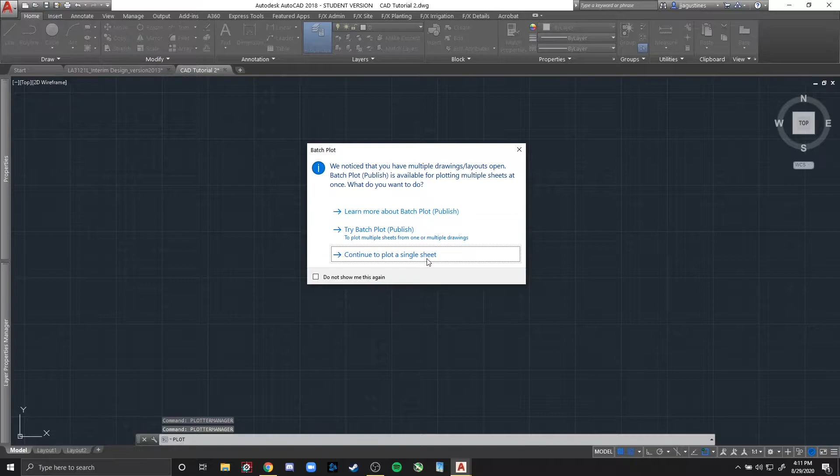And so after you download those styles, once this window is open, all you have to do is take the files you downloaded and drag and drop. And now they are in there, ready for you to use. A CTB, I'll show you right now, so then the next section makes more sense. So a CTB, like I said, attaches certain colors to certain line weights. So for this demonstration, I'll be using LA medium.

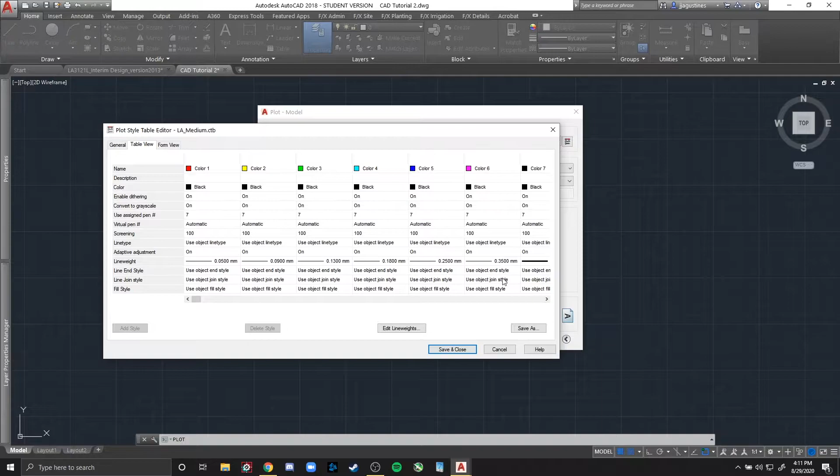And when I click this symbol up here and go to table view, you will see that there are 6 colors, all with their own different line weight. And what you'll notice is these line weights go from thinnest, which is 0.05 millimeters, all the way up to 0.35 millimeters. And that'll be really important for when we go into our layer manager.

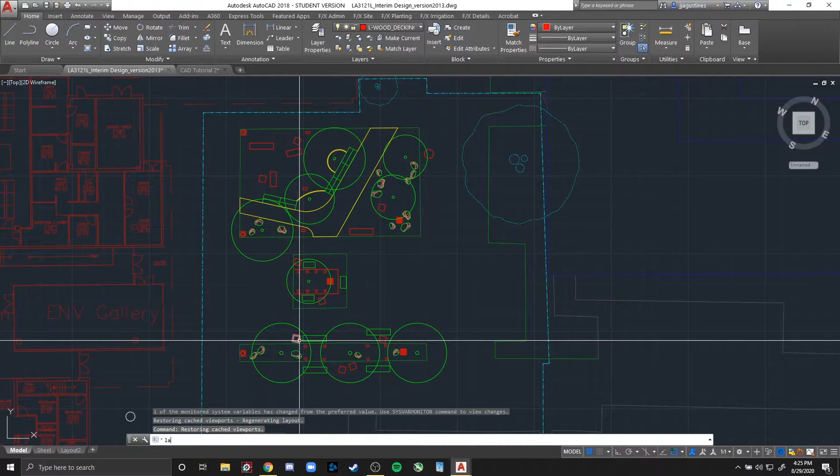So now let's talk about layers. Layers are your best friend. Good layer management is the key to really good drawings. And if you have really good layer management, you will never be lost in any of your drawings. Here's an example of what we did last semester. This is E&D Plaza. And as you can see, there are just a ton of layers. So practice good layer management right now. I'll tell you that much.

So we're going to go here, and this is your layers manager. There are several ways you can get to it. The first one is up here, but my favorite way to access layers is just to type in command, layer, enter, and your entire property manager comes up. There are several buttons you need to know about in the layer manager. The first three are up here. They look like stacks of paper with different symbols next to them.

The one with the orange symbol will create a new layer, or you could do Alt-N. The one with the red X will delete a layer, you could do Alt-D. Or this will set current layer for Alt-C. Some other important things to note in here are the freeze, which is basically your hide and unhide layer, your lock, your color, which we will be using. We will be using these index colors because of the CTB we just uploaded.

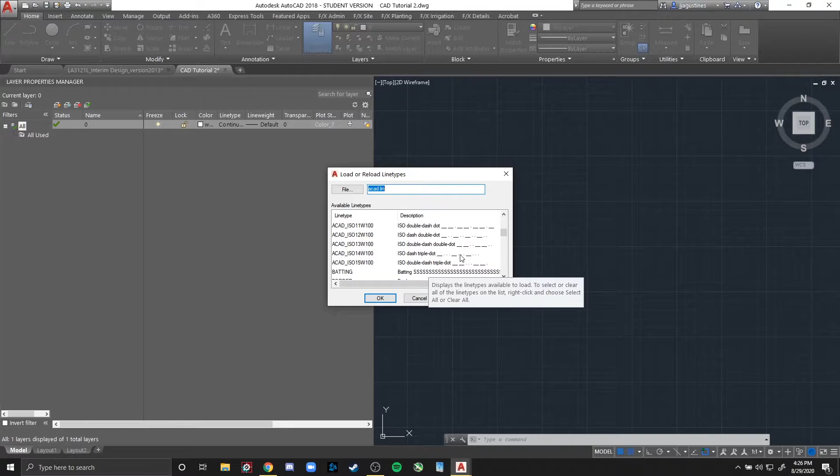Line type, there are different types of line types. There's solid, there is dots, double dash dots, S's, there's a lot of line types. And then we have line weight, which we shouldn't need to touch because of the CTB file, and transparency, plot styles, and stuff you don't really need to know about at the end.

So for this demonstration, I made a little drawing of a park. I have 3 trees, 4 benches, and a plot of land, or well, I guess it's grass. And when we are drawing in plan view, the things closest to the viewer will be thicker. So since my trees are higher up, these will be the thickest, and then the benches will be the second thickest, and then the grass will be the thinnest line.

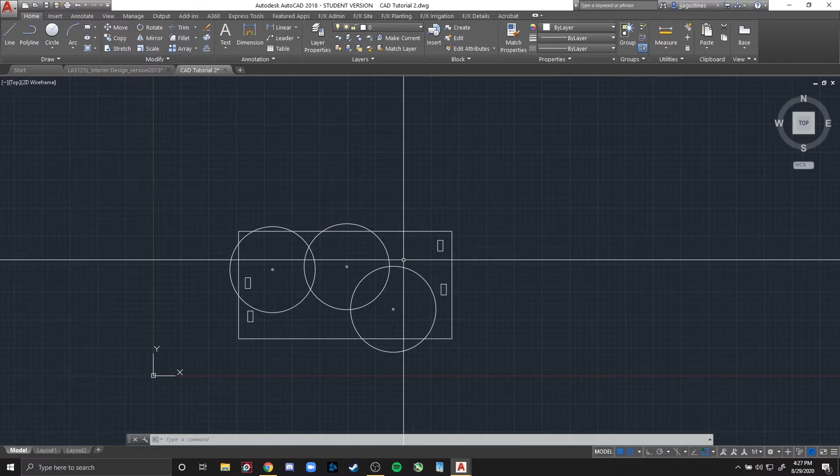So now we're going to go layer, and we're going to add 3 layers to represent each item. And to rename a layer, you could click it once, it will let you rename, or you could press F2 and let you rename, or you could right click and go to rename layer. So now I'm going to name these trees. I'm going to name this one benches, and we're going to name this one grass.

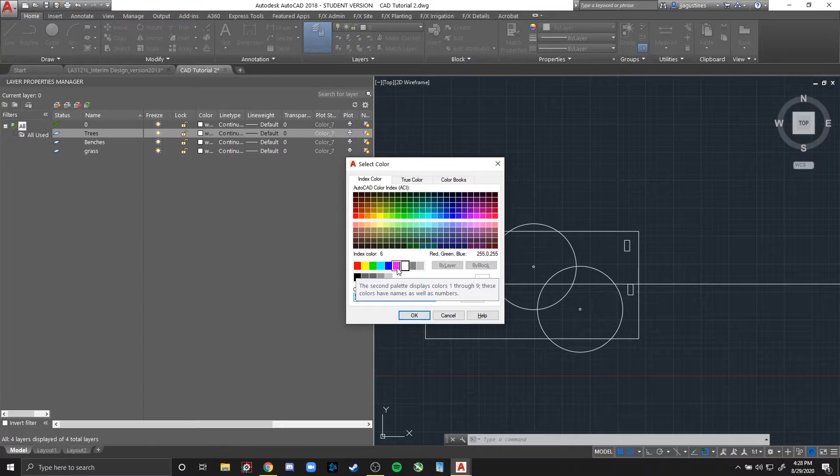And if you remember the CTB file we just uploaded, we know that the index colors from left to right will go from thinnest to thickest. So for right now, since trees are the highest thing in this plan drawing, I'm going to set it to magenta, which should be the thickest line weight. And then from there, I'm going to go down because they should be thinner the closer you get to the ground. But as you can see, my drawing hasn't changed colors.

So what you can do is you could set, let's start with the trees, you could set to the current layer, which is your tree layer, and I want to add this tree to that layer. You could do one of 3 things. The first option is go up here into this layer cell, and you're going to click on the drop down, and then you're going to set it to trees, and it changed colors, which is great. The second option

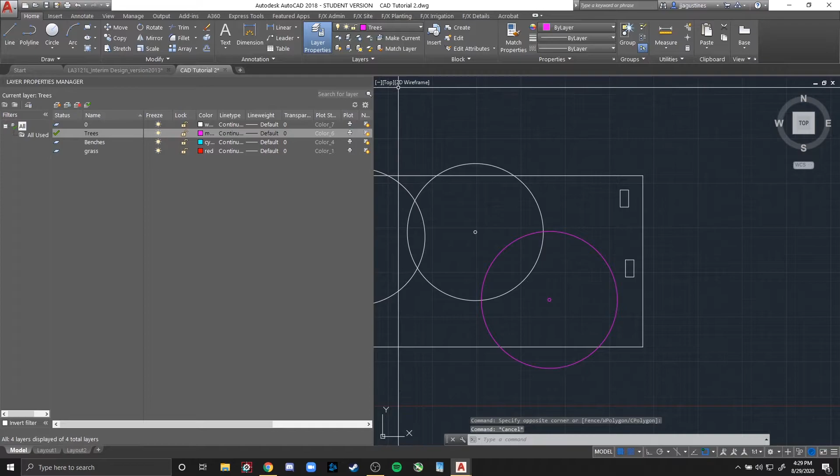is to highlight this tree, and then you're going to type in PR, which is short for properties. And a new menu is going to come up, but all you have to do is look for the layer and change it to trees. And the last way, the shortcut is MA, which is match property. And so we're going to choose a source object, and then now we could change the last tree into the tree layer. And now I'm just going to do the rest of these.

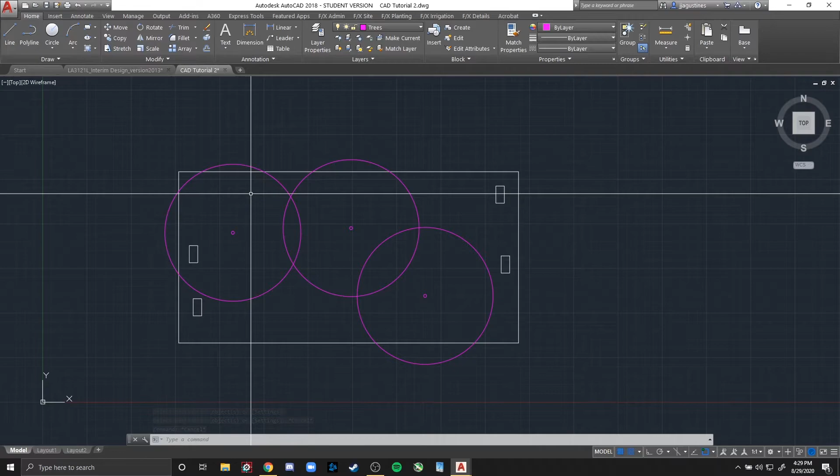Perfect. And now that each of these items are in their respective layer, we could turn them off, we could lock them, can't touch them, and now we are ready to move to our paper space. So at the lower left here, you'll see model and probably 2 layouts. We're going to go to layout 1, and by default,

the paper size is already set to 8.5 by 11, but if you want to, you could type in page setup, and from here you could create your own. So for example purposes, I'll name this one 11 by 17. And now you could change whatever you want, like you could go straight to PDF or OneNote or whatever you want, but just make sure you change your paper size to the correct size.

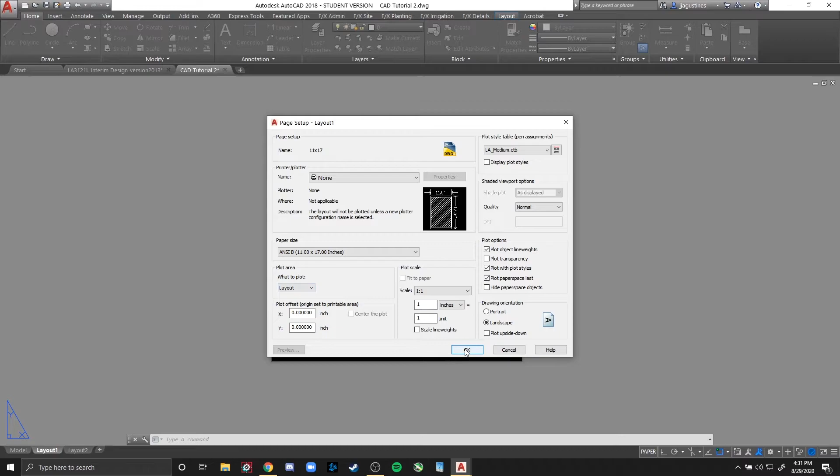So for example, I chose 11 by 17, and a bunch will come up, but for this purpose, I will be using ANSI B. And then we'll press OK. And then to set the new setup into paper space, you will double click. And now the page is set to 11 by 17. But I need to have it at 8.5 by 11.

So as you can see, there's nothing on this paper space. In order for something to come up, by default, your viewport should already be here. It's this little white square. But if it is not, you could type in mview, press enter, and you could specify a corner. You could click and click again, and your viewport will be there.

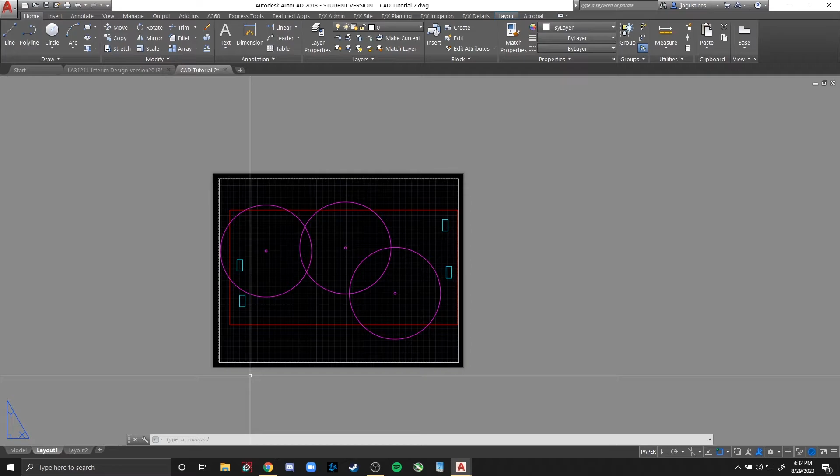So now, what we're gonna do is we're actually gonna add another layer. So bring up Layer Manager again, and we're gonna add one more. This will be known as viewport. The reason we have a viewport layer is for this button right here. When you click this button, it will not print the border around your drawing. It will only print your actual model in the viewport. Just don't forget to set it to your viewport layer.

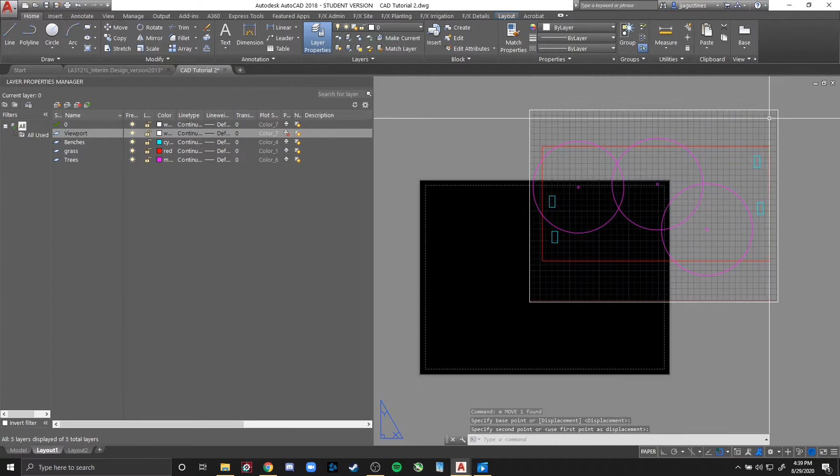To use the viewport, there are several things you could do within it. So if you click it, you could type in M for move, and you can move it around. You could rescale it with these corners to fit however you want it to fit within this paper. You could copy it. You could do Control C, Control V, and the new viewport will show up. You could erase it. You could do whatever you want with these viewports.

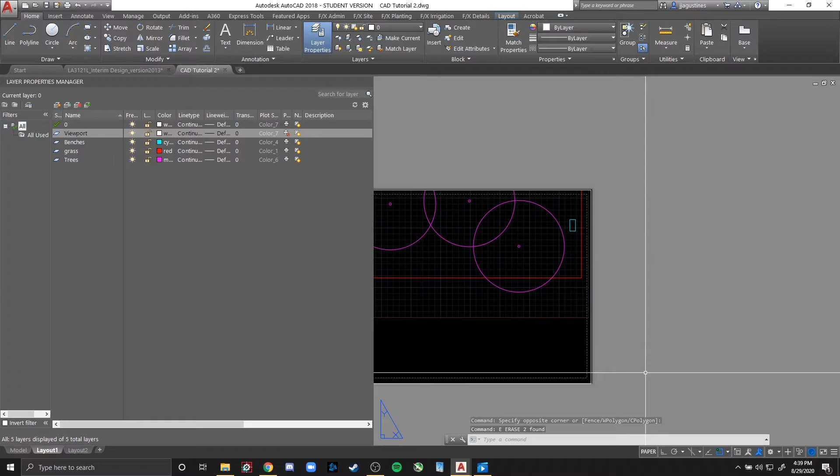If you want to work within the viewport in model, you're going to double click into your viewport. And now, as you can see, I am working in model space. And from here, you could do several things. You could modify your model, obviously, but the most important thing from here is down here, is your scale. So you could change the scale of where this drawing sits. So for example, I'm going to set it to quarter scale, and the drawing will move, and on 8.5 by 11, this will be at quarter scale.

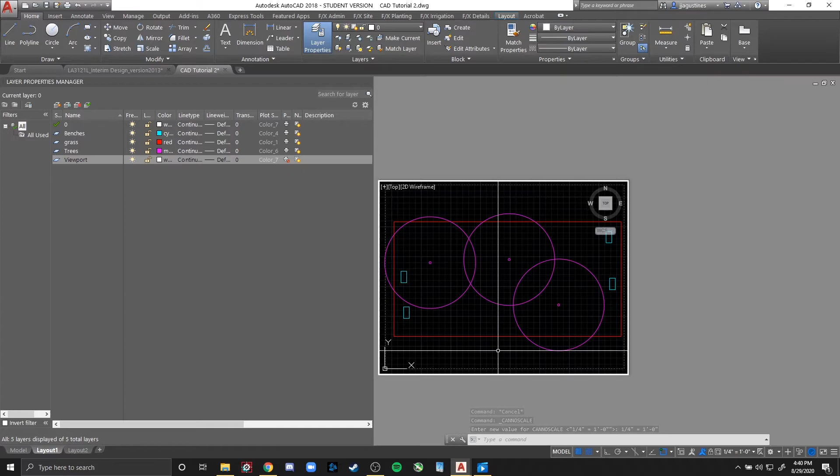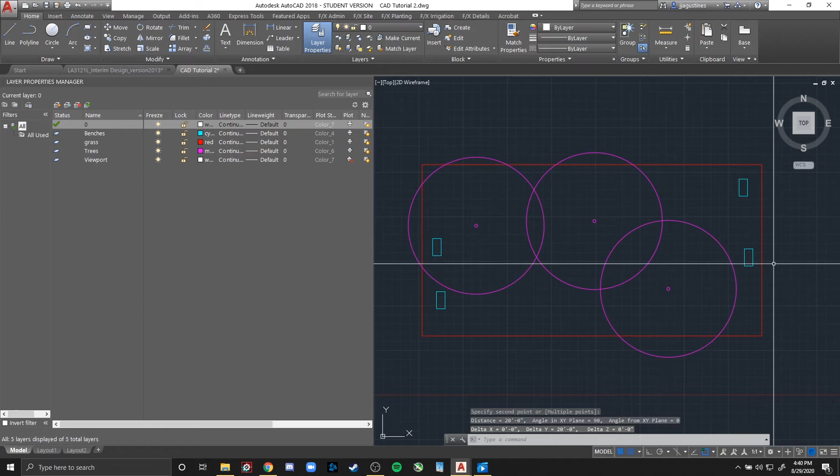So working with scale, at quarter scale, 1 inch equals 4 feet, which means on an 8.5 by 11 sheet, you have 44 feet longwise by 34 feet widthwise. To give you a reference, I made this model at, I believe it's 40 feet. Yeah, so it's 40 feet by 20 feet. So this should barely fit on an 8.5 by 11, in which it does.

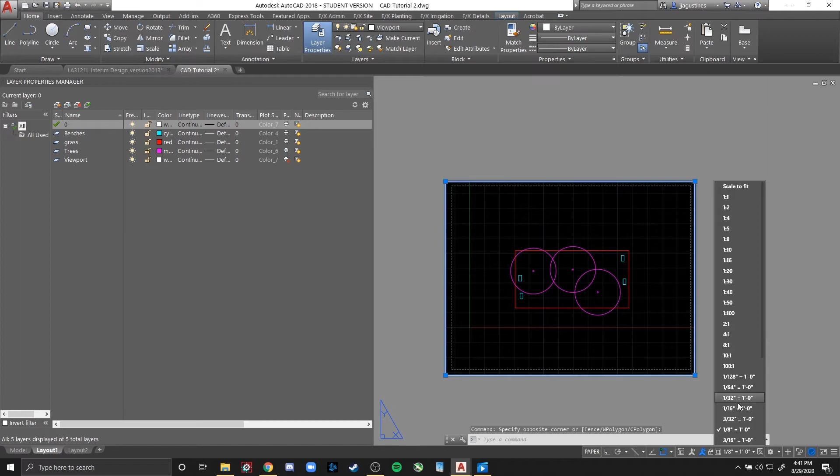I don't want to go too much into scale, but just know that when you click on a viewport, a bunch of scales will come up. Like this is 1/8, and so on and so forth. But I'm going to put it back at quarter. So now you're ready to print this page, like it's ready to go. So what your command is going to be is plot. So you're going to do plot, enter.

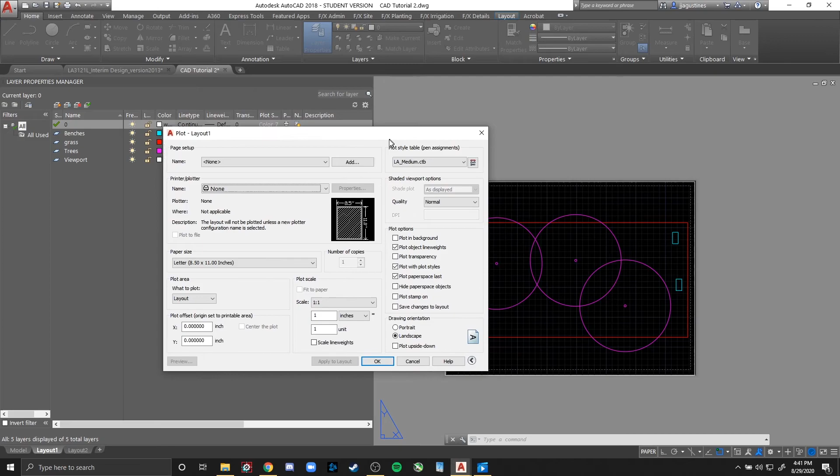I will continue to plot a single sheet. Make sure your CTB is the correct CTB you want to use. In this case, it will be LA medium. Make sure your paper size is correct. I have it set to 8.5 by 11. And for this document, I'm going to use AutoCAD PDF, the general documentation.

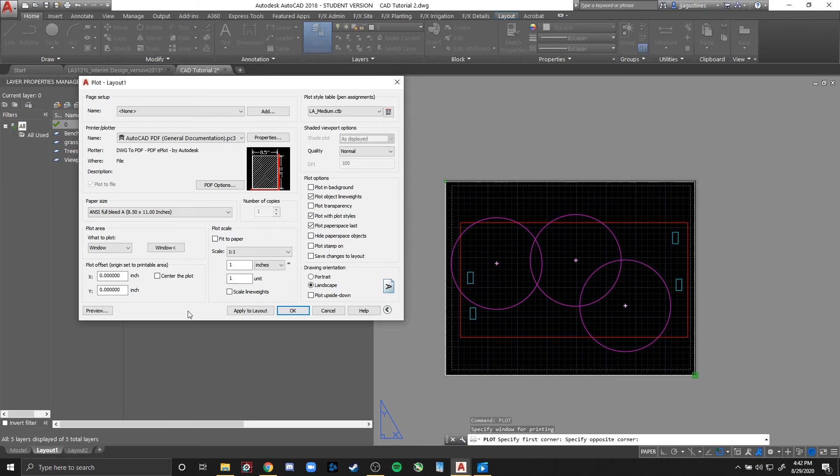One more really important thing to know about this plot menu is this plot area. You could choose to do a window, an extent, or a display. I mainly use layout or window. Window is really helpful because you get to choose just what you want. And then before you actually print, it's always super important that you preview it or do a test plot.

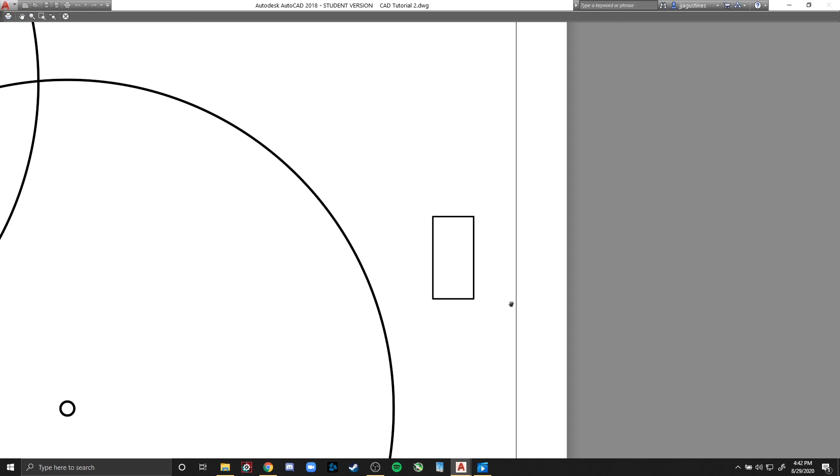So when you preview it, you could see that our line weights are in fact working. The trees are thick as it should be. Maybe we could go a little lower on the bench, and I think the line weight on the grass is fine. It's really important you do a preview because you could go back and choose a different line weight.

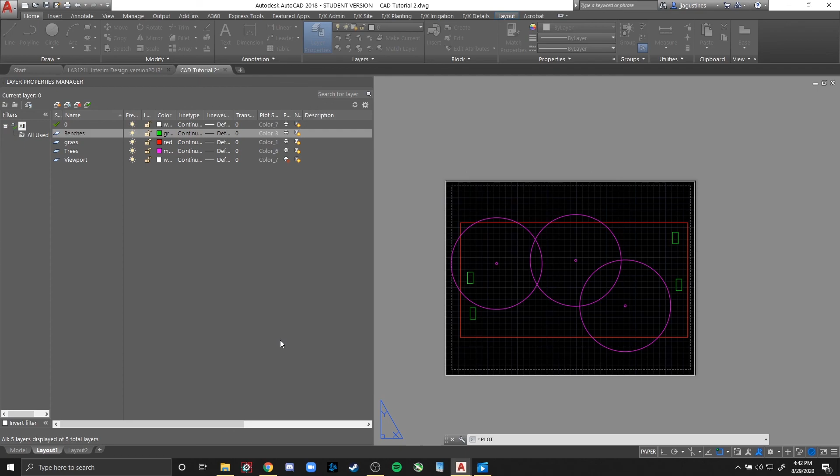Like for example, I think the benches could be a tad thinner, so I'm going to change it from cyan to green. And now we're going to go back to plot, continue plot single sheet, and make sure you set it to AutoCAD PDF and hit preview. Always check. Always check. I think that reads a lot better. It's not as thick as the tree, but it's not too thin where it blends in with the grass.

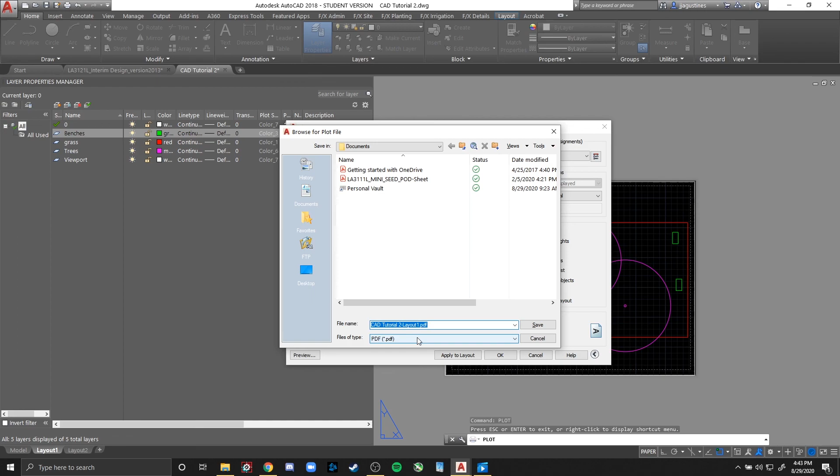And when you are happy with how your drawing is going to print, you could press OK. You could save it as a PDF, or you could directly print to your printer from here. And that is the end of tutorial number 2.